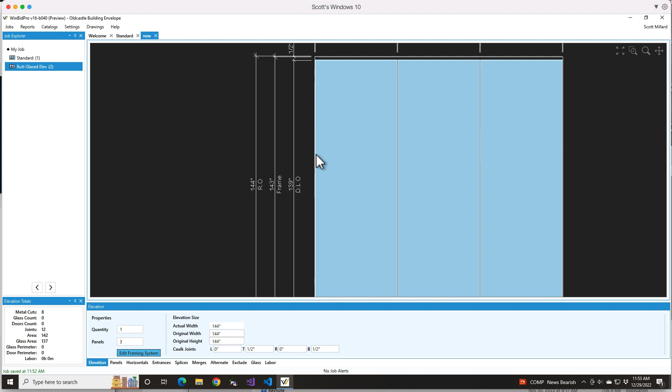In this one I'd like to talk about the tips and tricks for a butt glazed interior frame that has butt glazed verticals, and it could either have air gaps on the side or silicone on the side too, either way. And for that matter you could have air gaps in between panels of glass. But this is what it looks like.

So we've got a continuous head and sill that has the glass pockets to accept glass. And you'll notice when I zoom in, I've got my gap for in between the glass. So that could either be air or silicone. It all depends on what part you want to include, basically.

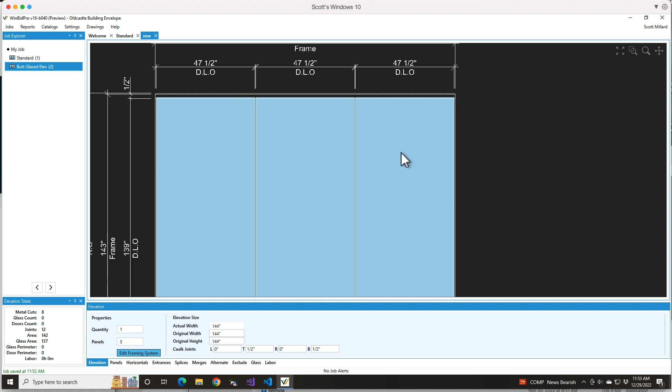So to get it to do this, I want to do a few things. To start with, the continuous head and sill are key, so we need to check these options in this first settings window, settings tab. So has head receptor, has sill receptor, we need those checked. And then we go to components, and you'll notice I have no head assembly components and no sill assembly components.

So that's assuming there's no snap-in kind of fillers that have to fill in between verticals, and our verticals aren't extending up into the head and sill receptors. So we're calling them head and sill receptors, but they're really just extruded continuous head and sills. So that's kind of a trick in the program to get this to work, is you need to not have a sill and head assembly, but you do need to have parts in the head receptor, sill receptor assemblies.

So if we edit one of these, the next trick is we're saying the profile, which is the reveal of, in this case, the head receptor. And then we also need to say there's vertical trim. So that means that vertical gap that I have between panels, we don't want that to extend into the head receptor in this case. So we're saying we need to trim that vertical 2 inches so that it butts up against the head receptor.

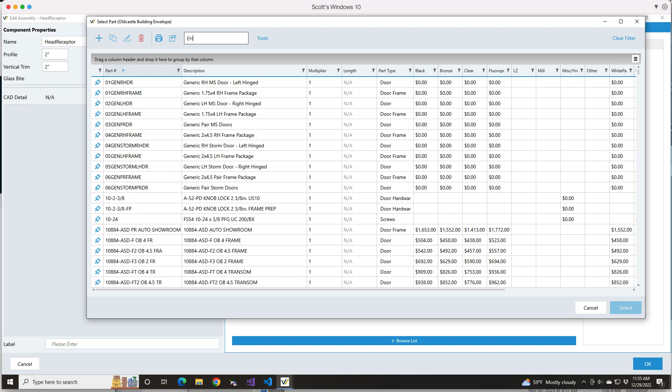So that's all I'm doing here, and then I'm putting whatever part number I need for the head, whether it's a tube or it has some sort of open back filler or whatever it is. All those parts can be entered here, and you can either click here and start typing a part number, or you can click Browse List and search for parts here. And I like to just start typing something like head receptor, and then it will show me what I need. So that's kind of how you want to populate these parts sections of the assembly windows.

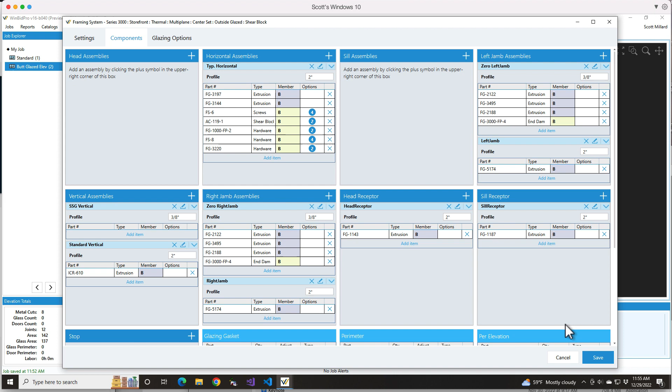So that's an example. You want to do the same kind of thing with the sill receptor. It's a 2-inch profile, and there'd be a 2-inch trim, and that gives you that look where that gap doesn't extend up into the receptors. So the next trick was the glass bite. So that's more of a vertical and wall jamb type of thing.

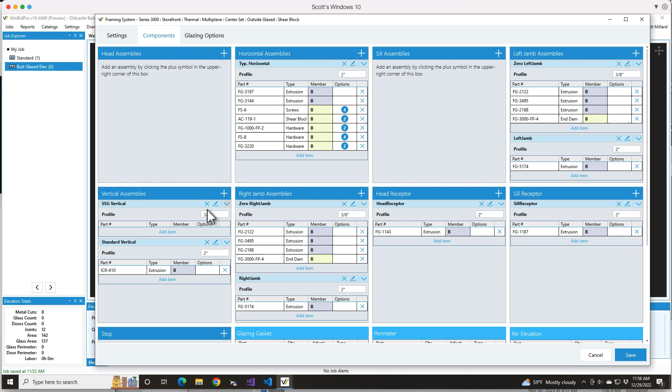But in order for that air gap to exist between the glass, there's really no glass bite. So we're not adding anything to the daylight opening size for the glass. So we're saying there's a 0 glass bite on the left and right of each vertical. So that's another trick, but that's what gets us the gap in between the glass here.

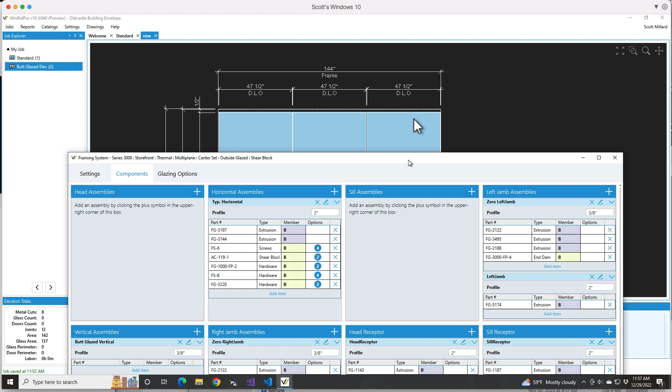So the next step is doing the same thing for the wall jambs. So in this case, I even named this one Zero LeftJamb to tell me that it's got 0 bite, but you can name it whatever you want. So the profile, I did create or define a 3/8 profile because I wanted a 3/8 gap, whether it's going to be air or silicone. So that's why there's a profile here, but there is no glass bite, so the glass isn't going to extend into that 3/8 profile.

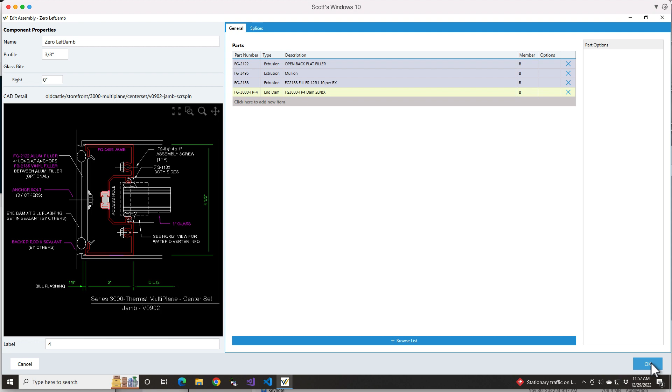So really that's the trick, is it's the continuous head and sill, it's the gap or the profile of the actual verticals, whether it's jambs or vertical mullions, and then no glass bite, because we want the glass bite to basically be the daylight opening between these vertical mullions. So that will give you the correct glass sizes.

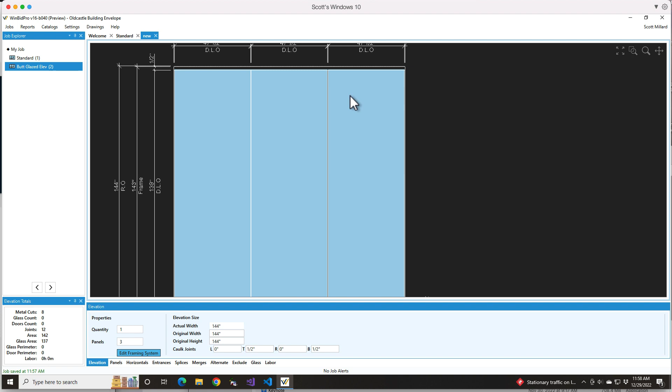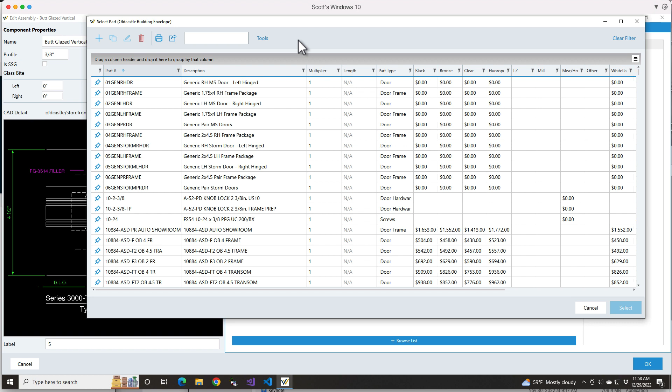If you wanted to put a part number in for silicone, you could tell it that SSG vertical instead of nothing. We could say add a part for silicone, and I don't know if silicone is in this catalog here. Yeah, so let's just say we've got a silicone part. I add that. Now it's going to give me kind of a stock length measurement and price for silicone. So if I priced it, a tube of silicone goes 15 feet. It's kind of treating it like a 15-foot stock length.

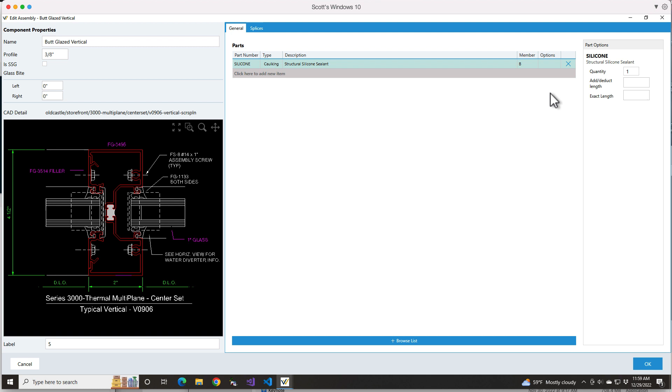The only downside here is that silicone part is going to show up on your cut list. So eventually we're going to be able to have a property for this part that maybe says don't show it on the cut list. But right now I think it's going to show up. So keep that in mind if you end up doing the silicone thing for a part.

But that pretty much sums it up for how you would draw this opening and get your glass sizes to come out right, get your extrusions to come out right, and then if you do want pricing for silicone, you can add it into the assembly.